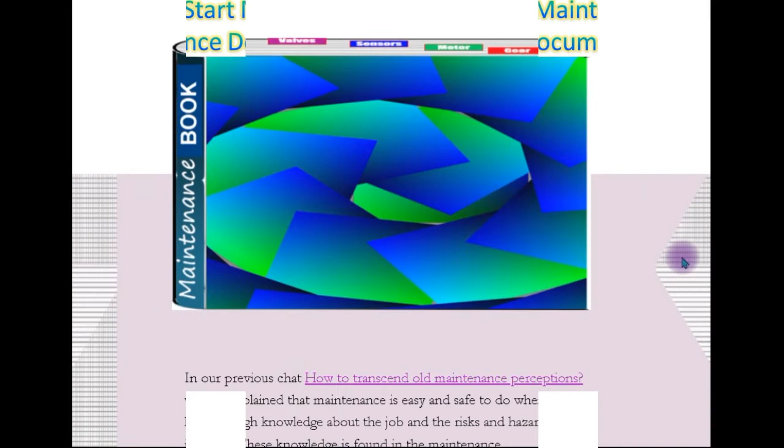Today we are going to speak about the heart of the maintenance documentation. We had spoken before that the knowledge is the blood in the maintenance, that you need some knowledge, some information to be able to do the maintenance and to keep the maintenance living, and we had explained it in our previous chats. Today we are going to speak about what is in the heart of the maintenance documentation.

And from this heart you drive the maintenance book. We said we need to follow the maintenance by the book. What is the book of the maintenance? Whether it is a manual book, it is on the computer, it is an expensive automated system for maintenance, whatever the book, you need this heart of the maintenance documentation before you start writing your maintenance book, whether it is a computer system or a manual one.

So beginning, we need to start with the question: do we really need a maintenance documentation? We do a lot of maintenance without documentation. We are going to see a live example, and then we are going to reflect about it in the bigger industrial systems and organizations. So what about your car? Your car, you are checking the oil level, fueling it, adding coolant, adding the wipers water, and you're not checking the car manual or the car documentation every time you need to do one of these activities.

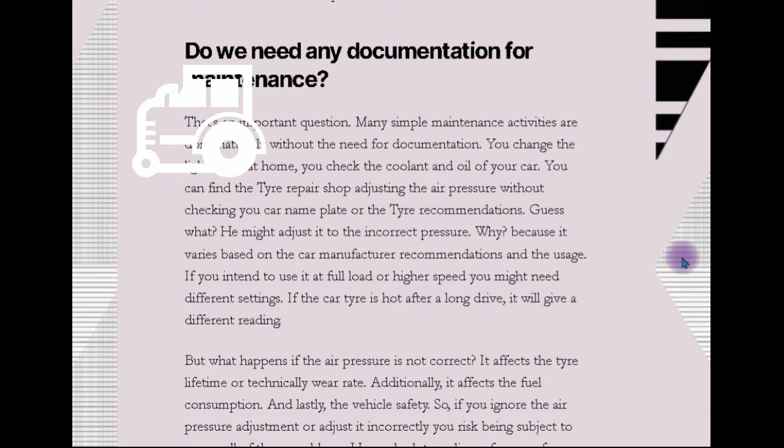Actually, you can find all around in the car some indications for the level of the oil, the level of the coolant water, the type of the fuel you need to use, the tire pressure. You can find it on the door of your car. And you can find that those who are working in this area are doing this without returning to the documentation. Suppose you are going to give your car to one of your children, then he needs to know where to get this information from and how to do it himself, and he needs to check it every time to make sure that he is doing it right.

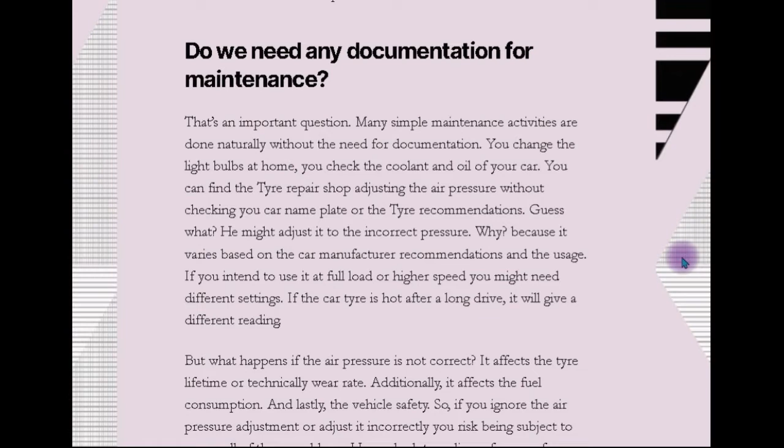So why do we need to do it right? For example, if you take the tire pressure as one example, if you didn't adjust the car tire pressure properly, then you are going to make the driving unstable, you are going to consume more fuel from your car. If the weather is changing, it's extremely hot now, and then we are going to the winter, the adjustment of the tire pressure differs. These different conditions generate the need to have a reference for every season pressure, for every driving conditions pressure.

Suppose you are filling your car tires with nitrogen instead of normal air, then you also need, when you are refilling it, to take care of this information and to pass this information on. So you need some documentation to find inside it all that you need to do in the car for your safety, for the efficiency of the usage of your car. So we are not giving a lesson about cars, just a typical life example, whether you have a car and you are doing this, or you can see other people around you doing these activities, and then you can revert to it.

But do I need to repeat reading it every time? No, I need to read it once, twice, three times till I'm sure and concrete about the information, and frequently I need to return back to it. And if I'm passing the information or the task to another person, I need to give him a source to the documentation where he can find this information.

And so what do we need to find inside the documentation? First, we need to know what maintenance activities to do, when to do it and how to do it, how to prepare for it, if I need to prepare parts or liquids or whatever, and then what I do during the maintenance activity itself, the execution, and what is the result and how to measure this result. So I need one document to contain all this. That's what we call the maintenance manual. The source of this usually is the maintenance manual.

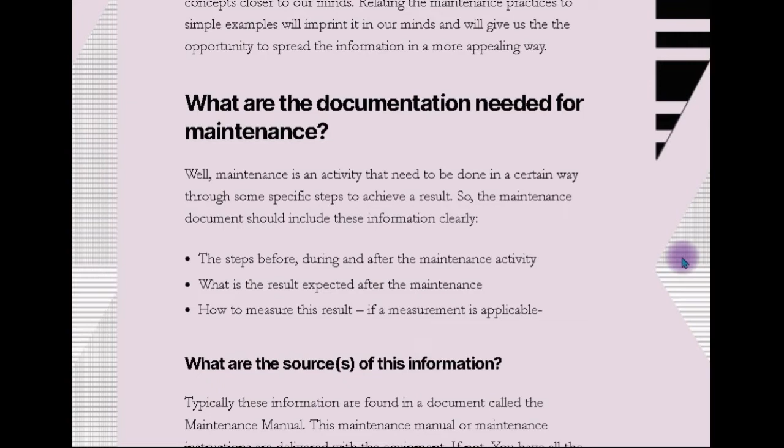Usually any equipment is delivered with a maintenance manual. Your car is delivered with a maintenance manual. If you are purchasing equipment for your workshop, for your working place, it's coming with a manual which is telling you what activities need to be done for the maintenance, what the results of the maintenance should be, and what precautions and parts you should prepare. So the maintenance manual is a very important part. If you don't have a maintenance manual for your equipment and you can't find it, you can reach your vendor if you can speak with him, or you can reach online sites.

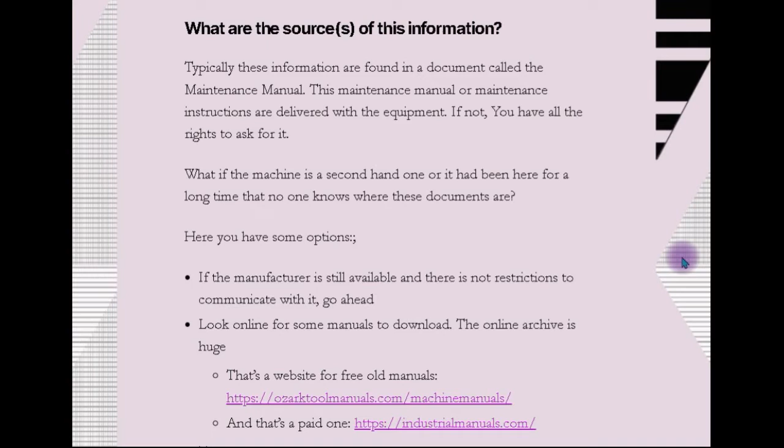You will find the links to these sites in the post itself, where you can find the link in the description. You can reach one of these sites, either free or paid ones, and you can find even all the equipment manuals on these sites.

You can outsource this activity so someone experienced can do it for you, or you can get a consultant to do this activity for you.

Another option, which is a great one: if you have your team doing this maintenance activity but you don't have a maintenance manual, you can start by recording what the maintenance team does and consider that the maintenance manual, and then update, upgrade, and adjust it till you reach the performance that you need. So you generate your own maintenance manual, and from the maintenance manual you generate your book.

What is expected to find in these maintenance manuals? In the maintenance manual, usually you find different versions of the same model in the same manual, and then you need to pick your version of the model so you can know the specifications, the exact tasks, the type of parts or fluids, and adjustments related to this special model of your machine.

You will find also some precautions while doing the activities: take care of this, switch off this, switch on this. You will find the types of the parts that you are going to use. Maybe you find some visual description of some of the activities that you need to do. You need to find its period, and some tests if you need to do them.

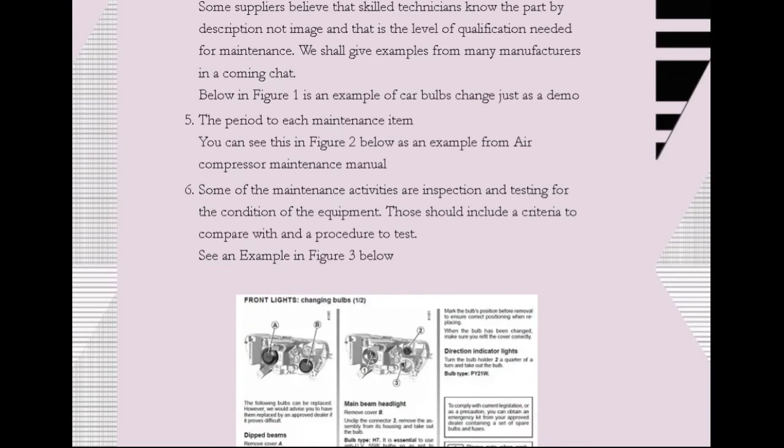That's a very small example derived from the maintenance manual of a car. If you need to change some light bulbs on your own, it's telling you for each one of these three types in the headlights, you can find cover A, for example, and that's for the dipped beams. You need to remove cover A, and then remove clip 1.

You can see this visual indication, and then you need to use a bulb of type H7, and there is a precaution that it's pressurized, so adjust it from the base, not from the bulb itself, so it's not broken, and that's a risk of injury. So you can see there's some risk or warning here, and also take care if the engine is hot and the fan is working, and take care of your local regulations about the lights, and that's equal for the other lights and their types of parts.

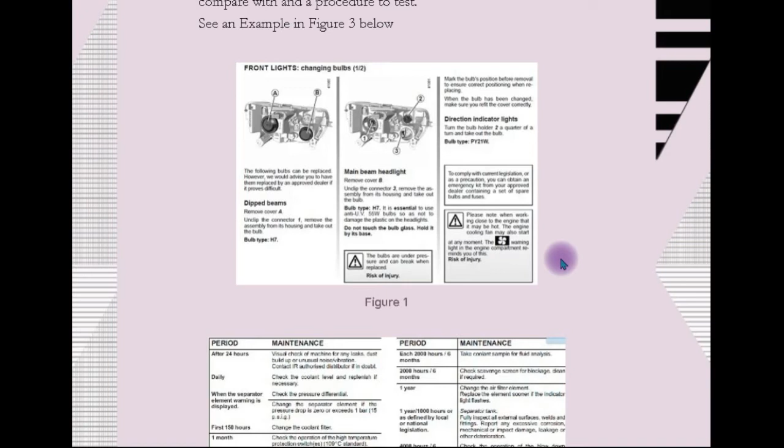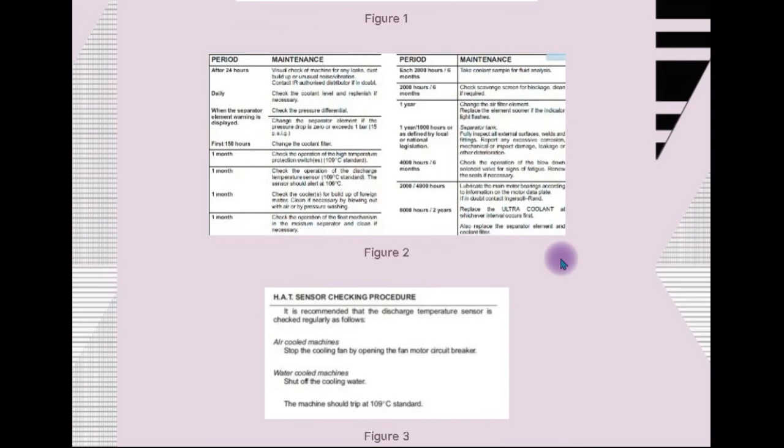So that's what we need to find in a maintenance manual. That's the type of document we need to look for: visual indication, numbering, pointing, types, precautions, and so on. You also need to find some regular maintenance tasks: the time, every month, every 2,000 hours of operation, every year, and then you can find also the tests, if there are some things that you need to test.

We had extensive talk about why you need tests and the hidden failures of parts, sensors, or protection equipment that you don't test, in our course about reliability and hidden failures, how dangerous a hidden failure is and how it can bring cascaded failures. You'll find this in detail in our course about the basics of maintenance, in the chapter which is a summary of reliability.

The last point about the maintenance manual: is it directly usable? Actually, for small machines, for your car and so on, it's directly usable. Yes, you open the manual and use it directly. For other equipment, industrial or big equipment, you will find many versions, many types, many schedules: every day, every week, every month.

So you need to take out this information and put it in other documents that are handy for everyday usage, whether you put it in an electronic system or just in a paper book and you follow the maintenance book.